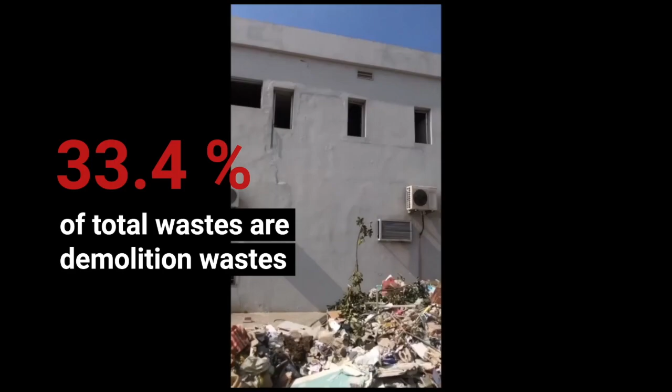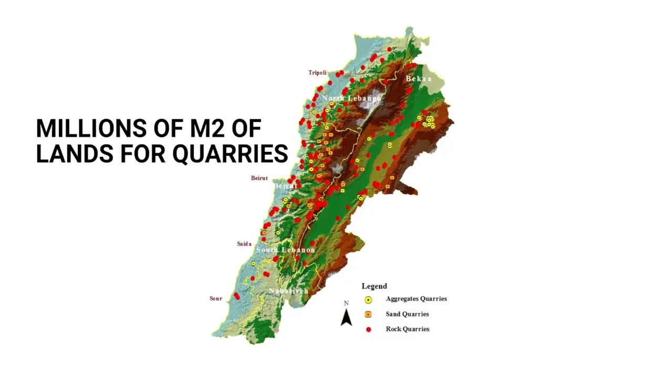33.4% out of the total wastes produced were demolition wastes. As for our mountains, they are not in a better condition. More than 1,000 illegal quarries occupying abundant areas distributed over such a small area are destroying our nature, resulting in 4.5 million tons of cement produced annually in Lebanon.

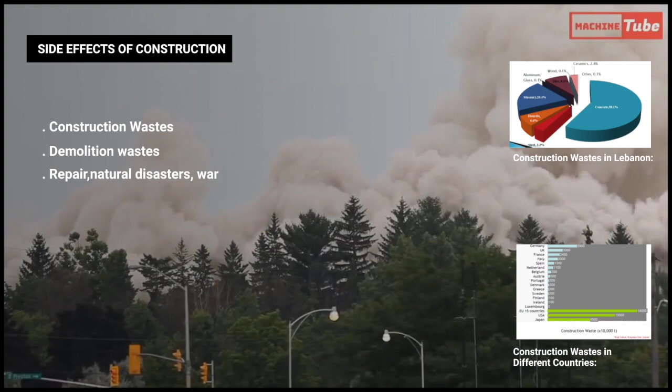Side effects of construction. The consequences of construction, manufacturing, and demolition exceed the boundaries of Lebanon to the whole world. Countries like the US, China, and European Union generate millions of tons of demolition wastes from repair, natural disasters, or even war, whose fate is to be dumped in landfills polluting the underground resources.

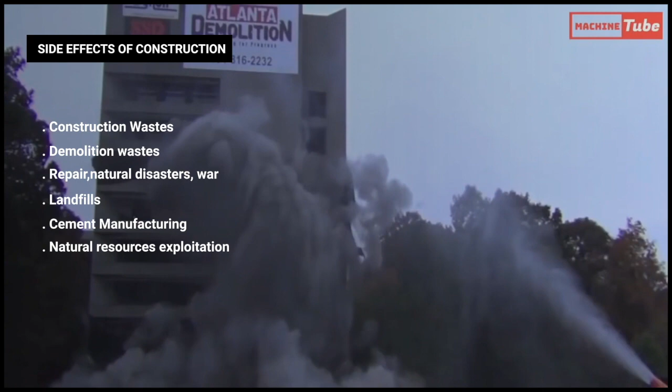As for cement manufacturing, 50% of its raw materials are extracted by exploiting natural resources. However, production processes cause the emission of carbon dioxide estimated about 8% of the total greenhouse gases, and the construction consumes 40% of the total energy. No, this shall not go on. A change must be done in the field of construction.

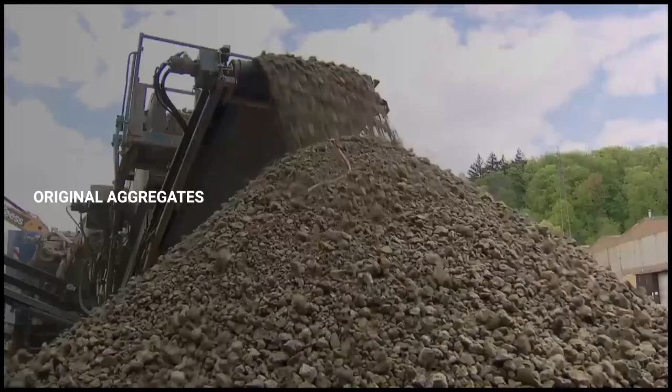Recycled concrete aggregates. They are heterogeneous material that contains aggregates of original concrete covered with mortar residue originally extracted from structures and pavements, crushed and sized. They can be an alternative source for natural aggregates in concrete production. Why RCA? They save around 60% of limestone resources, reduce space required for landfills, decrease CO2 emissions by about 15 to 20%, and save up to 20% of cost.

Now, what are the challenges of recycled concrete aggregates? RCAs increase the water absorption due to high porosity, but decrease the mechanical properties of concrete due to weak interfacial transition zones between the RCAs and cement paste caused by the adhered mortar on their surface. They also decrease the durability, workability, and compressive strength of the concrete. But is this the end?

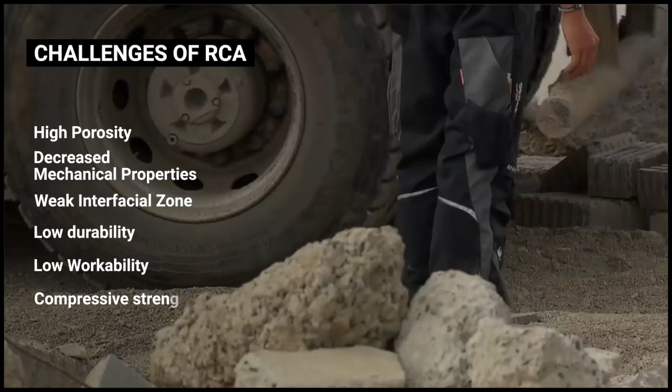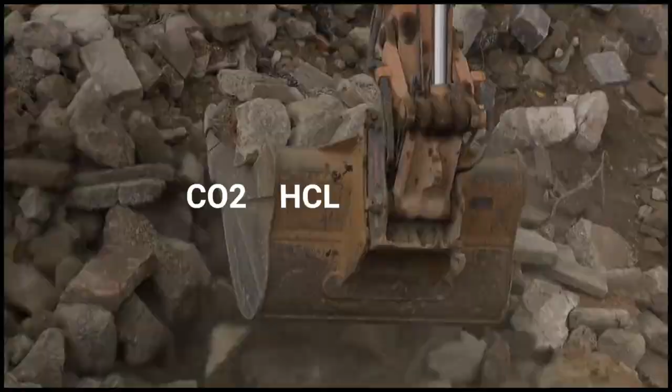No. Many treatments can be applied on RCAs to remove the adhered mortar and help regain many of their lost properties. Such techniques include CO2 treatments and HCl soaking. Another method that starts by introducing fly ash into the mixture can boost the properties lost by RCAs. But is this enough? Since we cannot give up on concrete, let us use concrete to save our planet.

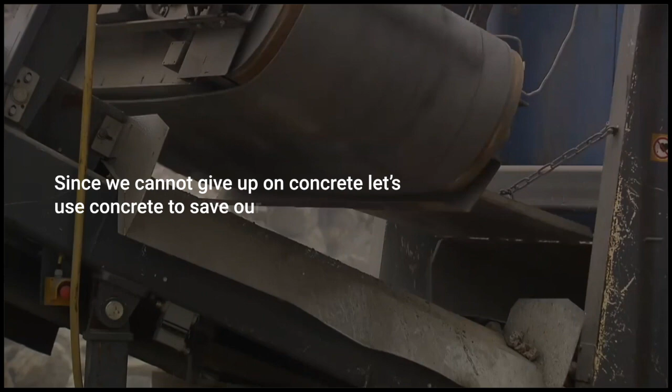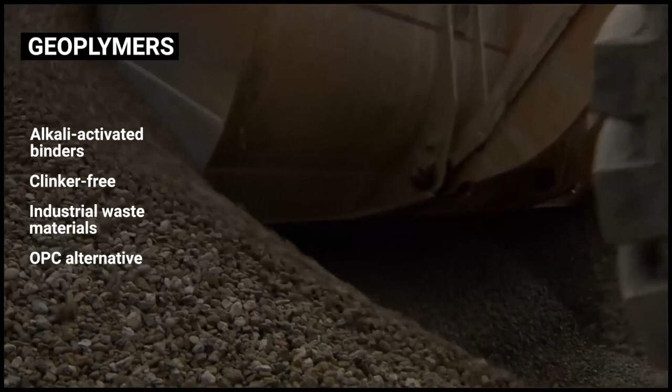And here come geopolymers. Alkali-activated clinker-free binder matrix made from industrial waste materials shows a great potential to become an alternative to ordinary Portland cement, having comparable chemical and mechanical properties.

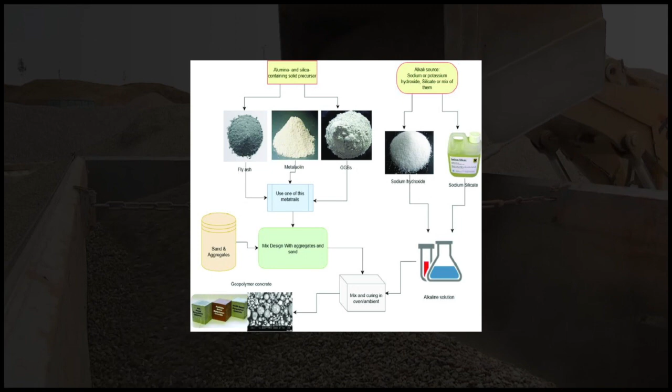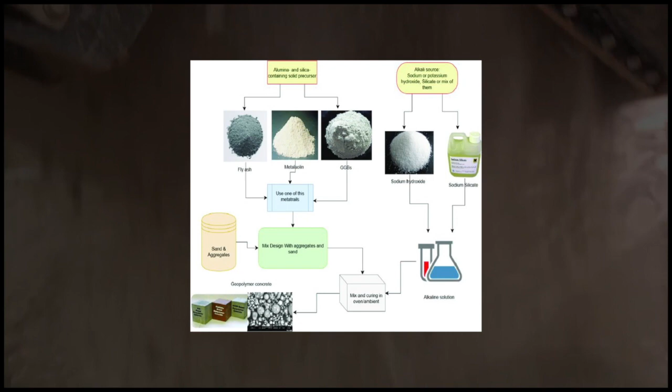How is it produced? It's the reaction of one or more of raw materials: fly ash, a byproduct of thermal power plants; ground granulated blast furnace slag, a byproduct of iron and steel factories; or metakaolin, a dehydroxylated form of the clay mineral kaolinite; or other materials containing aluminum and silica, with an alkaline activator containing alkaline hydroxide solution or silicate solution, which helps dissolve and activate silica and aluminum, polymerized in a rapid reaction to form the inorganic polymer.

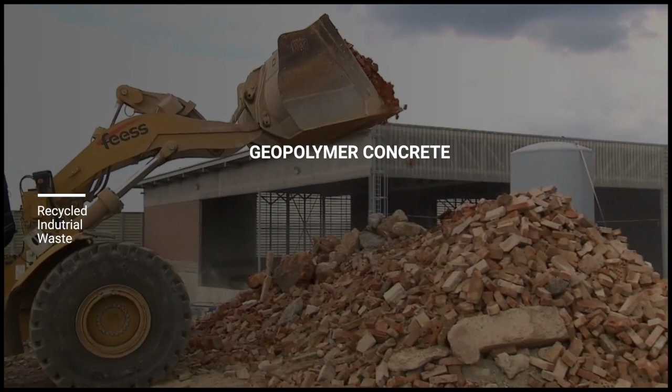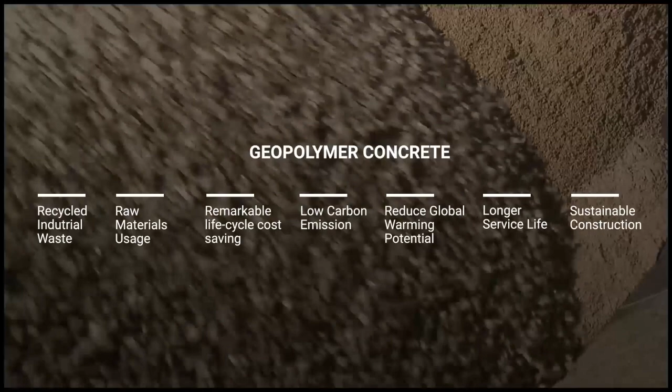Why geopolymers? Produced from recycled industrial waste, saving virgin material usage, having remarkable life-cycle cost savings, decreasing CO2 emissions, and reducing the global warming potentials, all while attaining remarkable properties. Geopolymer concrete is our ticket towards a more sustainable future for construction.

What about treated RCAs in geopolymers? Demolishing structures into concrete, brick, or ceramic aggregates, then treating them by adding appropriate mineral admixtures, results in a substance that we can introduce into a geopolymer concrete mix. This ensures the applicability of all construction wastes to be reused as natural aggregate alternatives in structural buildings and an applicable concrete mix.

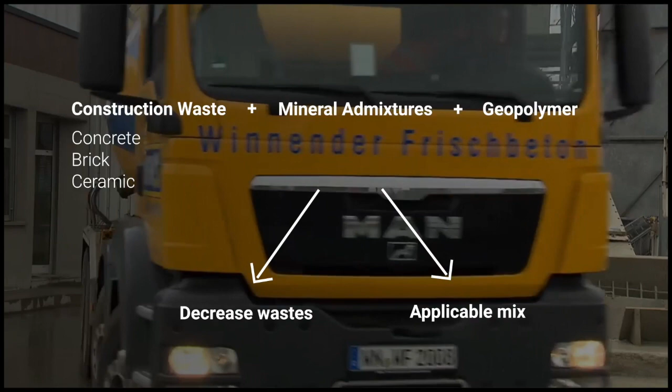What closes the loop is the possibility of recycling these structures, known as second-generation aggregates, having better mechanical and durability properties, hence permitting a sustainable cycle with the least percentage of construction wastes.

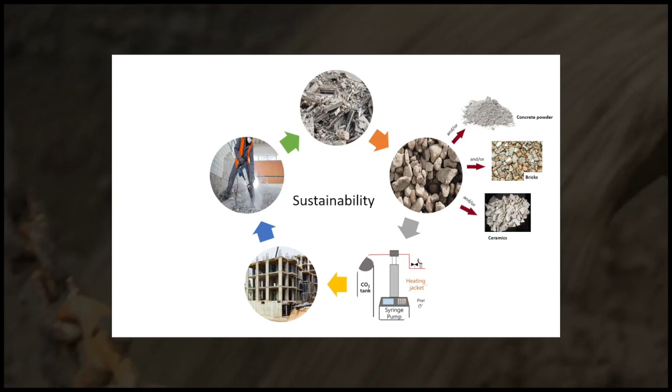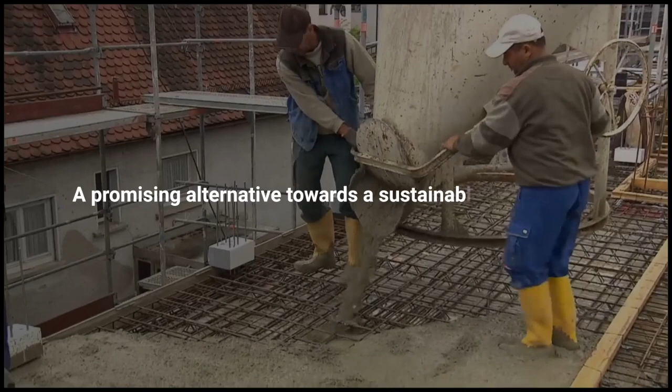Construction is conservative to change, but substituting cement by geopolymers and aggregates by treated construction wastes is a promising alternative towards a sustainable environment. It started by the idea of reducing wastes and ended by an entire closed-loop cycle to save the environment and heal our planet. So what are we waiting for?